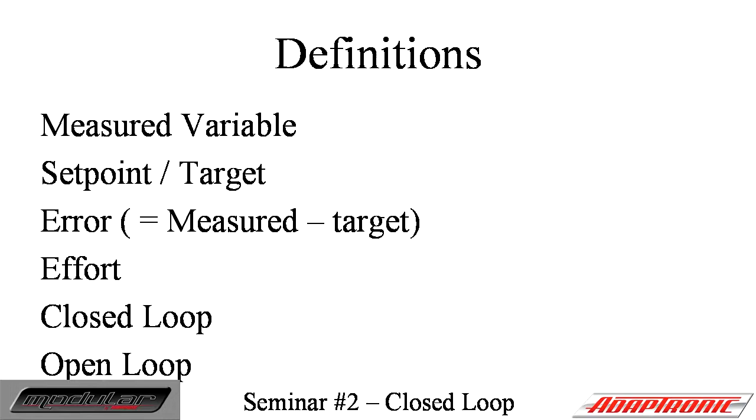And closed loop and open loop, I'll just show you this. So a closed loop system is where we have a target, and we have the RPM at the right-hand side, which is what we're trying to measure. The RPM minus the target is our error. Again, positive means that we're above the target, negative means we're below.

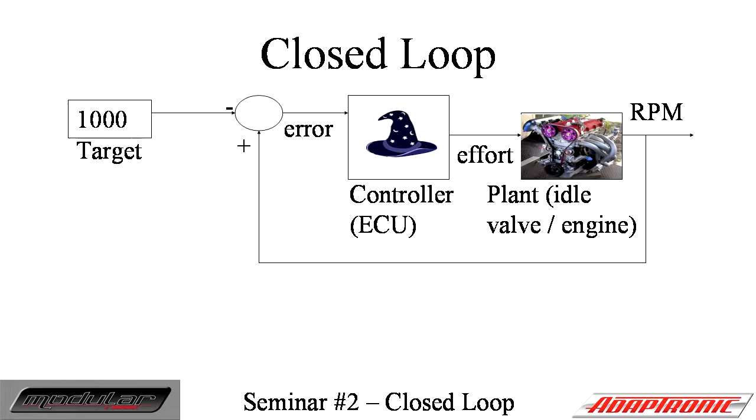That goes into some wizard magic stuff that we don't quite understand yet, but we will in about half an hour. Then that controls the actuator on the engine, so the idle control valve or boost control valve or electronic throttle or whatever the thing is that we're trying to control. That's called closed loop because you can see there's a big loop there, which is called the control loop. The alternative to that is open loop, which I think is a pretty silly name because there's no actual loop there. But that's what it's called, so there you go. I don't make the rules, sorry.

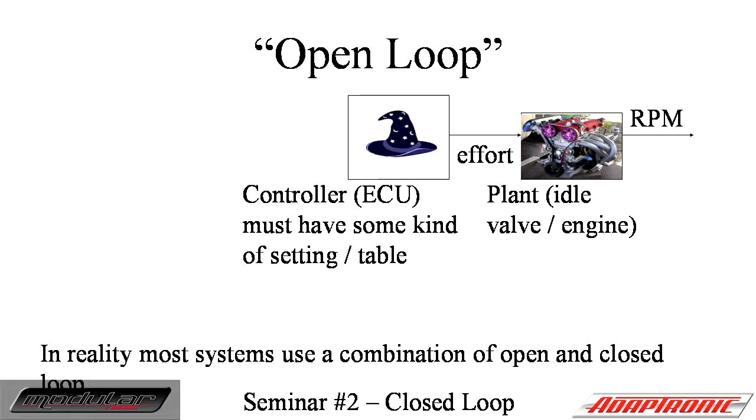For this to work, the controller has to have some sort of setting or table, so whether that's a duty cycle table against coolant temperature or whatever. But the point is that it doesn't actually measure the RPM, compare that to a target, and then use that to adjust the control effort.

In reality, most systems actually use a combination of open loop and closed loop. If you imagine a system which only had closed loop and no open loop, say if you're doing closed loop fuel control with an O2 sensor and you had no fuel map at all, it was just one cell, and you tried to drive it like that and just wait for the O2 sensor to correct the mixtures, it would be pretty awful to drive. So in reality, you need both in most circumstances.

Okay, so this is Tim Tam time. I want you to think of some examples of closed loop systems. For each of them, there's going to be some function on the engine, so what you would call it as a tuner, the variable that we're measuring, the actuator that the ECU can control, and the target. So does anyone have any ideas on function?

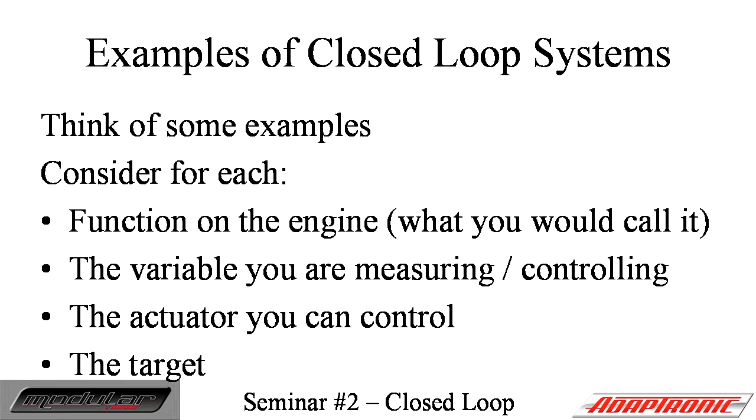Boost control. Hang on, I'll just tip all these out so I can get them easily. Okay, boost control. Any others? Fuel trim, yep. Variable valve lift, very good. Any others? Come on, there are heaps more. Take the easy one, idle control. Yep, idle control, yep. Traction control. Okay, cruise control. Oh, cruise control, yep.

Okay, I've got a really easy example that even the crappiest ECU on the market will do. Thermofan. The temperature is the set point. The actuator is the thermofan, and when it goes above the temperature, we turn it on. That controls the temperature of the engine by cooling it. Then when it goes below the temperature, we turn it off. It's not PID, it's not usually a pulse width modulated thing, but it is actually a closed loop system.

Another example you may not have thought of is a rev limiter. If you're trying to get to a certain RPM, or trying to not exceed a certain RPM, you do an ignition cut or fuel cut or however you want to do it, and that brings the RPM back down.

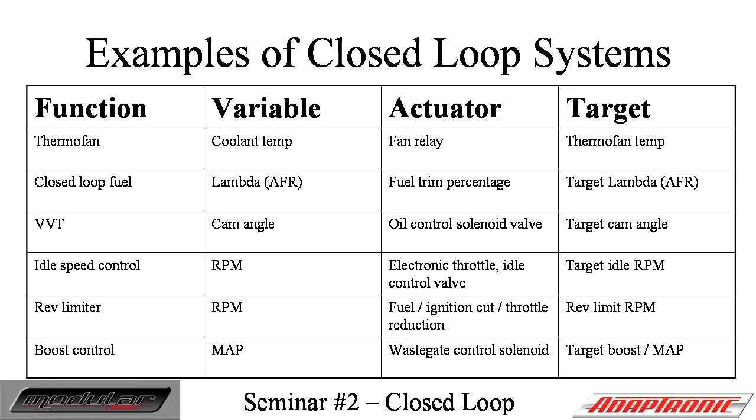Another one, actually boost control, it's actually a closed loop system even if you don't have an ECU in there. So if you just have the compressor exit routed through to the actuator, and that pushes the wastegate flap and controls the boost that way. So that's still closed loop even though there's no electronics in the system.

Okay, so I'm going to go through an example with some numbers here because PID is actually quite mathematical. I'm going to avoid any calculus or Laplace transforms.

So if you can imagine that we've got an engine that's idling at 700 RPM with an idle duty cycle of 30%. And this engine needs 40% on the idle valve to achieve 800 RPM. If our target's 800 RPM and our current RPM is 700, then that means our error is actually minus 100. Make sense so far?

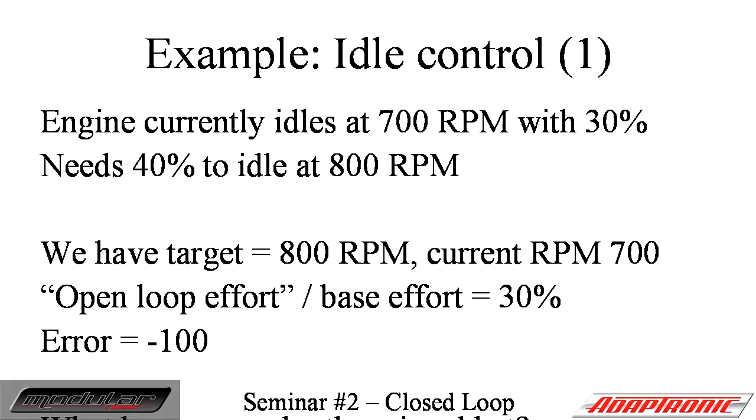Okay, so what happens then under this wizard hat to control the idle speed? What would it need to do to get it up to the 800 RPM? It's opening up the idle air control. Oh yeah, so it has to do that. It has to do that, but how much and when and under what conditions?

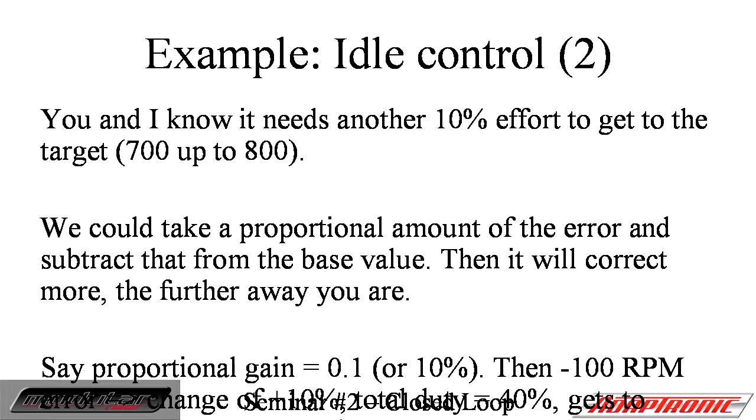So you and I know, because I've just told you, that we need another 10% of idle duty cycle to get to our target, but it doesn't know that. So the simplest thing to do is we could look at the error, which is minus 100 RPM, take a percentage of that and subtract that from our duty cycle. So for argument's sake, if we take 10% of that, then our 100 RPM error becomes 10%. We add that to our 30%, we end up with 40%. We're at 800 RPM now.

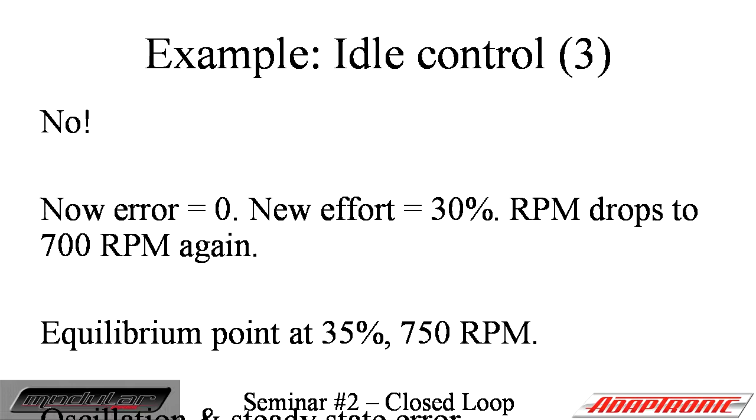Happy days? No, not happy days. Not happy days, because now we're at 800 RPM, so our error is 0. So now our new effort is 30% because it's our base value plus 10% of the error. So we go back down to 700 RPM with 30%. So now we're going to go back. So it's going to oscillate between 700 and 800 RPM and between 30 and 40% duty cycle.

Now there's actually going to be an equilibrium point there of 35% effort and 750 RPM. That's the point where the error exactly matches the gain times the extra percentage that we need to give to the idle valve. So it'll actually be steady at that point, it won't oscillate.

But there's a couple of problems here. First of all, that's 750 RPM, not 800. So there's still a constant error there. It's never actually going to reach 800 and stay there. And the second problem is that there's this oscillation problem that's going to occur.

If you reduce the gain, so instead of having 10% of the error, say we only have 5% of the error, then it might not oscillate, but then the steady state error is going to be even greater. It's only going to get to, what's that, 733 RPM or 725 RPM or something like that. So that's a problem. It's still better than not doing anything though.

Now, can you think of a mechanical system that's similar to a proportional controller? A thing where the amount of error you have is proportional to how hard it tries to correct it. Not talking about duty cycle, I'm talking about a completely mechanical system, no electronics, no thought, just a...

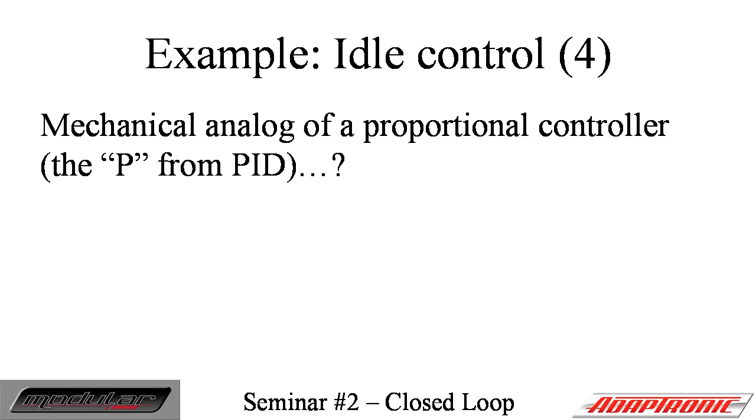Beautiful. Yep. Thermostat, yep.

That'll work. The examples I had were... but that's not closed loop though. It's not actually resisting, it doesn't have a target that it will sort of be happy at and then resist from. The examples I was thinking of were...

A fuel pressure regulator. The way that happens is you've got a diaphragm inside, the pressure difference acts on the diaphragm, makes a force, the force acts on the spring. Depending on how hard you push the spring, depends on how far it moves. Push the spring with twice as much force, it moves twice as far. That's the proportional thing, and you can put in a stiffer spring or a weaker spring to change that percentage.

As that happens - if you went to my talk yesterday - fuel pressure regulators always do have a steady state error. The more fuel you flow through them, the higher the pressure becomes. Or the higher your injector duty cycle becomes, the lower the pressure becomes, even on the best regulators in the world.

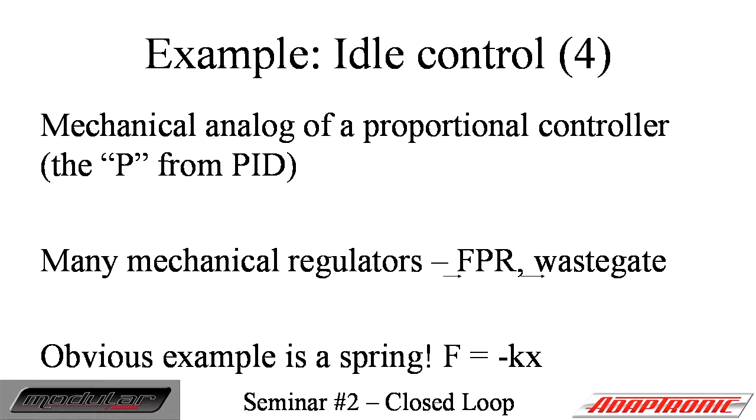Wastegate, like the example I gave before, if you've just got a mechanical wastegate - we all know what happens if you've got an actuator spring that's a bit too weak and your wastegate's a bit too small, you end up with boost creep at high RPM. One of the ways you can fix that - there's a particular turbocharger manufacturer that makes internal wastegates, and they tend to have this boost creep problem at high RPM. You can replace them with an aftermarket actuator, which I assume has just got a stiffer spring inside, and they don't do that as much, just because the proportional gain is higher.

But it's still there, there's still steady state error. An even more obvious example, a spring itself. Imagine a suspension spring on a car, where the happy point, where it's exerting zero force, is the uncompressed length of the spring. If you drop the car on it, it's always going to sit a bit lower. You put more weight in it and it'll force back up, proportionally. And if you hit the car, it's just going to bounce up and down - it's going to oscillate, just like the example we had before.

So the question is, can we somehow remember that 10% that we needed to get to that 800 RPM? Can we add it up over time to get there, so that we get rid of that steady state error and end up at 800 instead of 750 or wherever? And the answer is, yeah, we can.

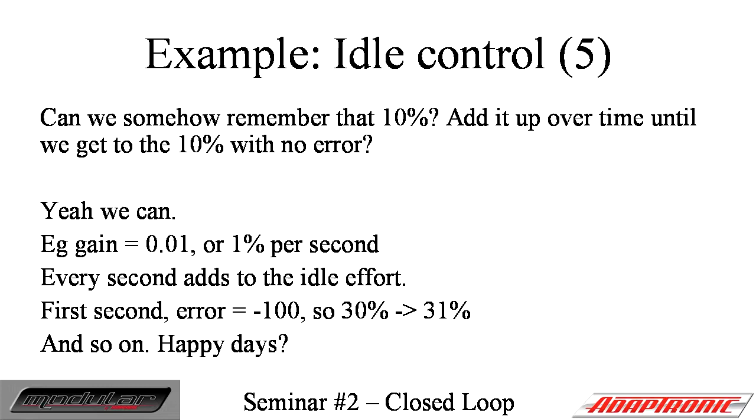So here's our target of 800 RPM. Here's where we are, at 700, right? And our idle duty cycle is here at 30. So that's not really well lined up. Okay, there we go.

1% of that is 1%, right? So go up to 31. But now we're not at 700 RPM anymore, we're at 710. So now this new error is not 100 RPM anymore, it's only 90 - that means we're only going to go up 0.9, so it's 31.9. So it goes up a bit more. And that's not quite 80, it's 81 or something, so it goes up a bit less. So it eventually gets closer and closer and closer.

And eventually, as time approaches infinity, it'll get to 800. But it's going to take longer than 10 seconds to get there, so that's a pain. Can we just add 2% each time instead? Well, yeah, you can, but you end up with this oscillation problem. But we get rid of the steady state error, so that's a good thing - a good thing to remember. It's not enough, but it's something that will help.

I couldn't really think of any good mechanical examples of this.

Probably the best analogy I could think of was a toilet cistern, where it remembers, if you like, the volume of water, and then when it gets to a certain point, the float valve shuts it off. But that's not a proportional thing, it's an on-off thing, but anyway.

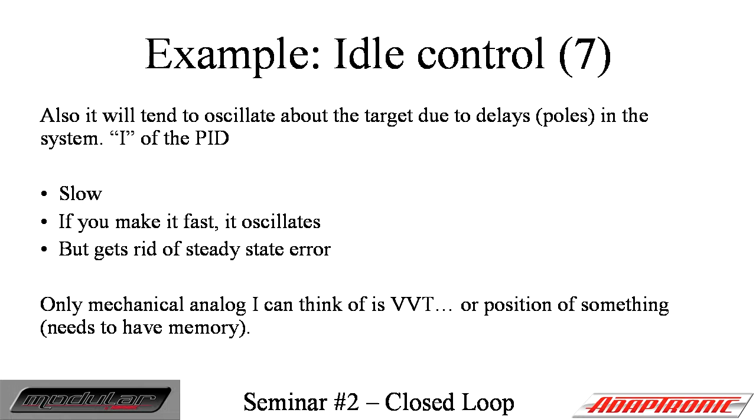So the other problem is that we have to have some way to damp the oscillations. The reason being that if you only rely on the proportional and integral terms I described before, it's going to be too slow. So you need to be able to have a large amount of proportional gain and somehow deal with the oscillations.

By the way, fuel pressure regulators, if you have large fuel pulses, you can actually get them to oscillate at certain frequencies. That's why on factory fuel rails they have dampers on them to deal with those oscillations. These days with people removing those and putting on billet rails and using hard Teflon coated lines to deal with ethanol, fuel pressure oscillations in rails actually becomes a big problem.

So how can we damp the oscillations? Well, normally the way you do this is by attempting to operate against the direction of change. So rather than looking at the RPM, we'll look at how quickly the RPM is increasing or decreasing. If the RPM is dropping quickly, then we'd actually increase our duty cycle to try and stop it dropping. If it's increasing quickly, then we'd decrease the duty cycle to try and counteract that. And again, that's going to be proportional, so if it drops twice as quickly, we'd open it twice as much.

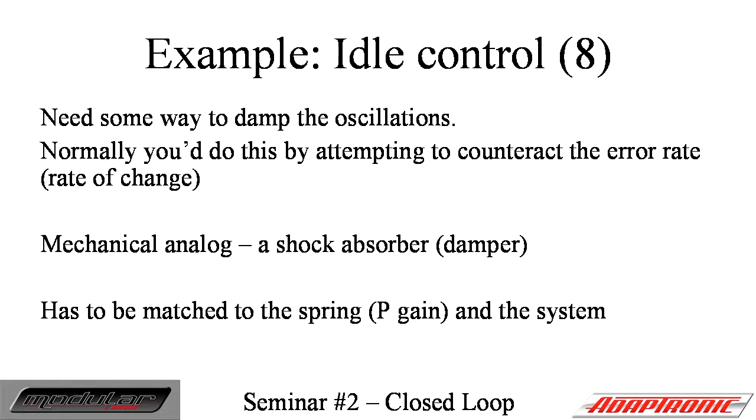And the mechanical analogue of this is, of course, a shock absorber or a damper. If you've got a constant length on it, it doesn't exert any force at all, and the faster you move it, the harder the force it responds with. As you probably also know, if you've ever played with adjustable shocks, you have to match it to the spring. If you turn it all the way to the soft setting, and you've got fairly stiff springs, then the car's going to oscillate, so it's not giving enough damping. And if you turn it all the way hard, then it'll actually slow down the response of the spring, and the suspension will be too stiff.

So in practice, what you need is a combination of the proportional, integral and differential gains, and they'll need to work together. I'll go through how you work out what those gains need to be empirically when you've actually got a system that you can play with. We've actually got a system downstairs which I invite you all to have a look at as well, but I'll tell you about that later.

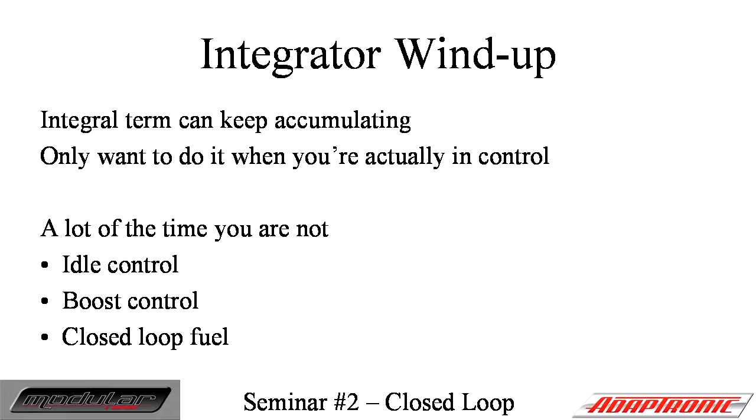Now, the next thing I need to talk about is a problem called integrator wind-up. We have this system where, because of the integral term, our duty cycle can increase or decrease over time continuously, while ever there's an error there. So what we have to make sure is that we're actually in control of the system we're trying to measure at the time. Otherwise, it's going to go all the way one way or all the way the other way. I'll give you an example of that with idle speed control.

I bring that up because I care about drivability. The ECU has to have some way of knowing whether it's actually in control of the idle speed or not. So for example, sometimes people say, well, can't you just look to see if the throttle's closed? No, because you might be in gear, driving along with the throttle closed, and the engine might be at, say, 2,000 RPM because you're traveling at 30 miles an hour or whatever. So the car's pushing along the engine, if you know what I mean.

So if you have the ECU in closed loop idle control at that time, then it's going to say, well, we're idling too high at the moment because we're targeting 800 and we're actually at 2000, even though the engine's not actually idling. It doesn't know that. And it'll keep dropping down the duty cycle. Then you put your foot on the clutch when you stop the car and the engine stalls. So that's a particular problem. The way different manufacturers get around this is by having either clutch or neutral switches or a vehicle speed sensor, and then it only goes into closed loop when the car's stationary.

Another example is boost control. If you're trying to target a certain amount of boost and the turbo's not actually spun up yet, so it can't actually make the boost you're trying to target, then the boost control is going to keep increasing the duty cycle in vain because there's no way the turbo can make that boost yet. And then at the higher RPM, when the turbo does come on boost, you're actually going to get a boost spike because of this integrator wind-up problem.

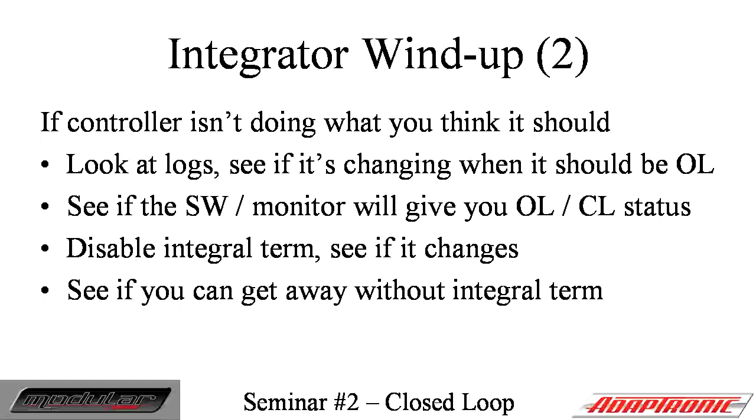Another way you can check it is by actually setting the integral term to 0 and seeing if you still get the problem. If you do, and you either can't get away from this because the controller doesn't have enough information to go into closed loop or open loop, or you don't have the ability to switch it into closed loop or open loop, you can see if you can get away without the integral term.

The way you'd normally set it up is start with PID at 0,0,0 and try to do as much control as you can from the proportional term. The reason being that's the fastest to act, and it doesn't suffer from integral wind-up issues and that sort of thing.

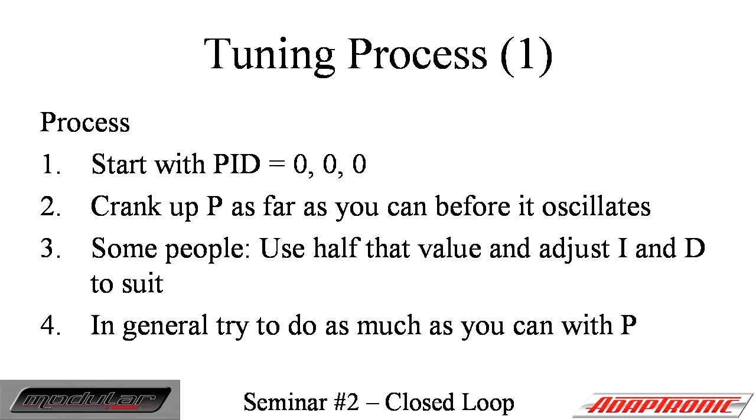What some people generally say to do is crank up P as far as you can before it oscillates, then use half that value. I'm a bit more aggressive, so I normally use a bit more than half that value, and then adjust I and D iteratively to suit - I adjust I to get rid of the steady state error, and D to adjust the oscillations.

So you can see this if your software allows you to do striplines - a rolling log that sort of moves across the screen - then you can see the oscillations very clearly in that sort of environment, and you can adjust D accordingly.

The thing that limits the amount of derivative gain you can apply is normally how fast the system is actually sampling the variable you're trying to control. So coming back to idle speed, often you can't use a lot of derivative control for idle speed because the measurement of RPM only happens every compression or induction stroke - so on a 6-cylinder, it's every 120 degrees, for example.

That will limit how high you can put the D term. If you can't get it high enough to control the oscillations, then you need to reduce the P. And if you get the I as high as possible before it starts to oscillate, that allows it to get to the steady state as quickly as possible.

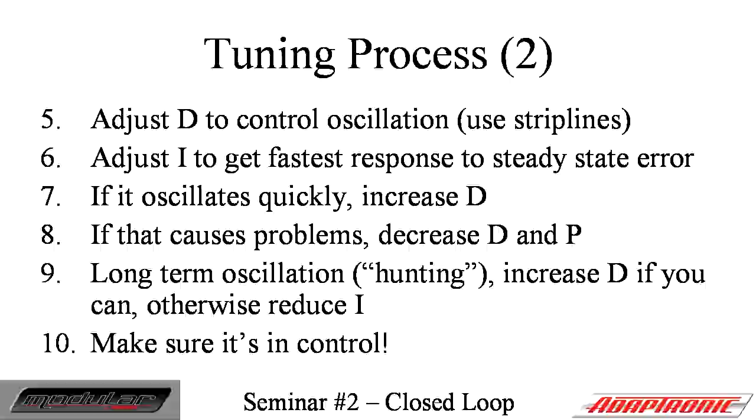Okay, so I've got a couple of examples here of actual logs from people that I've seen.

I wonder if I can turn down the house lights? Just a little bit. I don't think you can turn them off completely. Okay, do that.

Okay, now it looks like I've got one Tim Tam left here. So who wants to have a guess as to what's wrong with the settings?

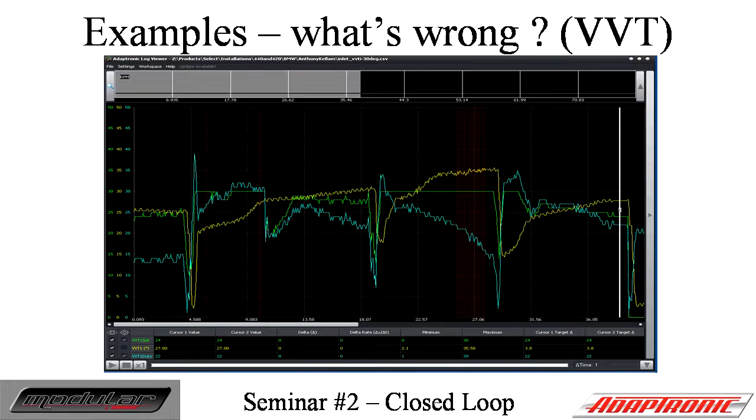Too high on the P? Too low on the P. Too low on the P. Now, should I give it to the first answer or the correct answer? I'll give it to the first answer, I think. I think I already gave you one. Okay, so who was too high on the P?

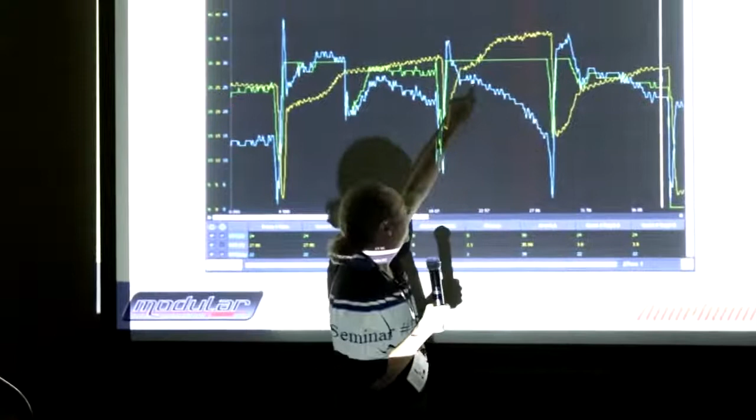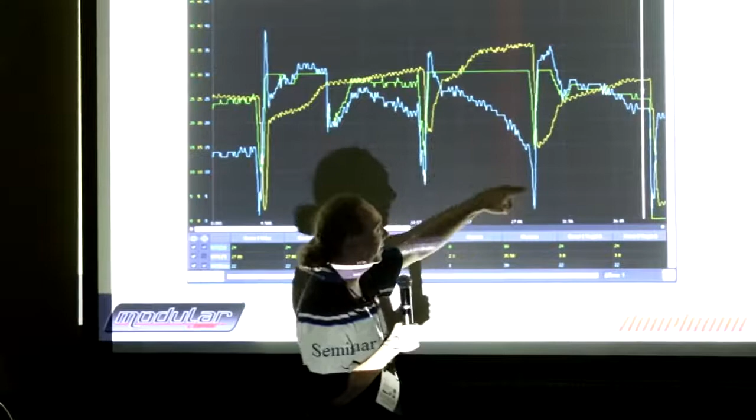Maybe it's a bit hazardous doing this in the dark. Anyway, you can see that in this area we're still above the set point, and our duty cycle is dropping over time, which means it's the integral term doing that. But it hasn't dropped low enough yet to bring the cam down to where it's supposed to be. So in other words, you could say he's trying to do too much with the I, but really the answer is that the P isn't high enough to actually control it.

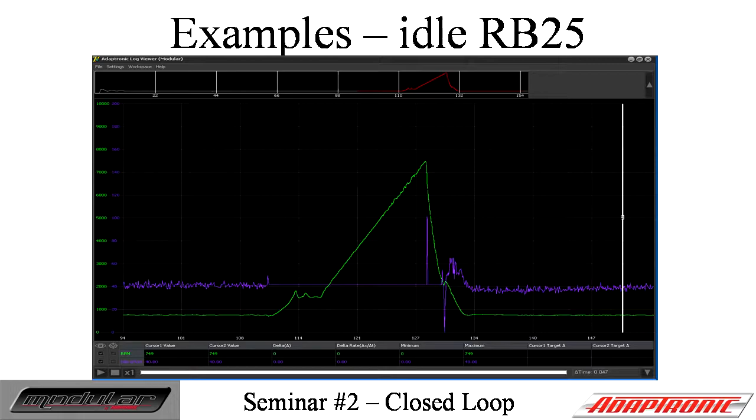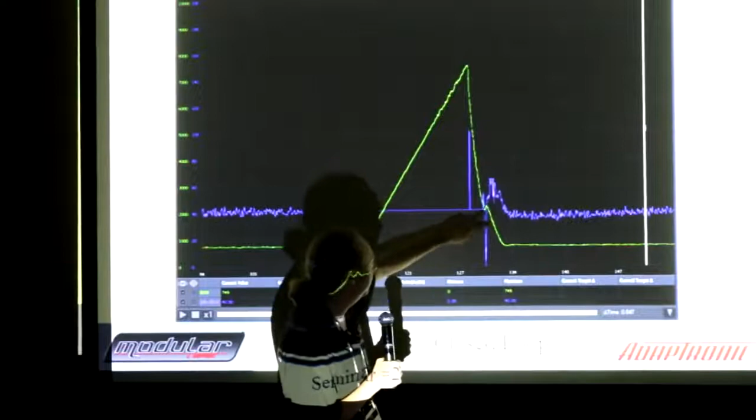And then you see it goes flat during the power run because we're not in idle control then, since the throttle's open. On the way back down, this is where I put my foot on the clutch, and it gives a little spike there. At this point, it's actually increasing the idle effort using the derivative term to just bring it back down to idle gently. After that, it's very nice and flat.

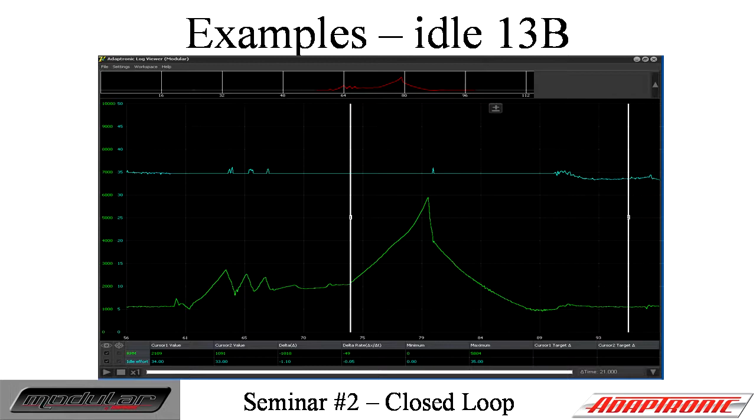This is another one with the 13B, but that basically just shows the same thing anyway.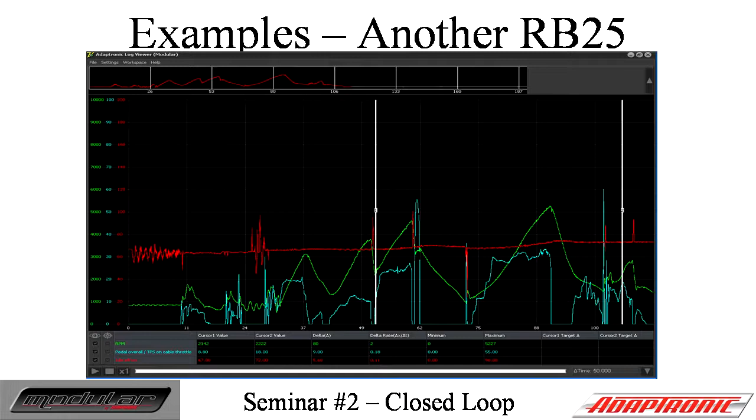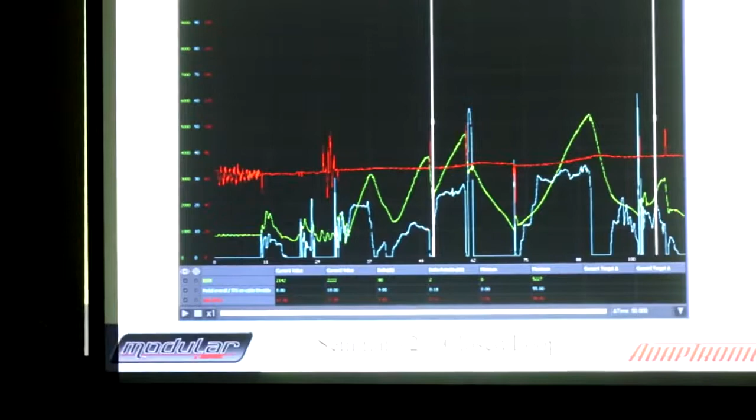Okay, I don't have any more Tim Tams, I'm sorry. But does anyone want to guess as to what's wrong with this one, especially here? We see this is RPM here. You can see a bit of a wiggle in the RPM, but it eventually settles down. And then we've got another wiggle there where that's supposed to be at idle.

Can anyone have any ideas as to what's wrong with this one? Red is the duty cycle? Yeah, red's the duty cycle. And the light blue one's the throttle position. Integral too high? Derivative's too high. Yeah, so...

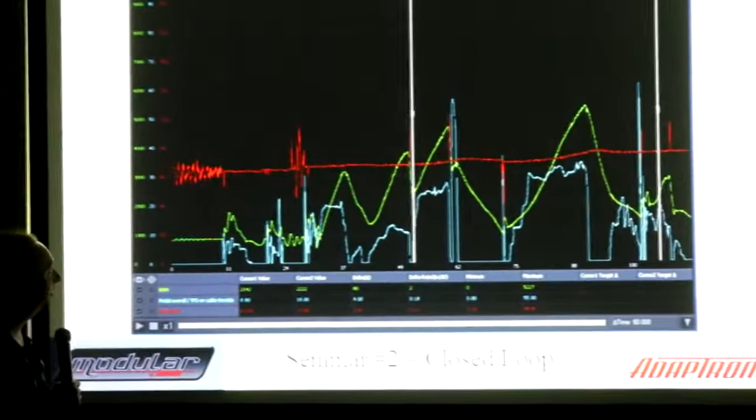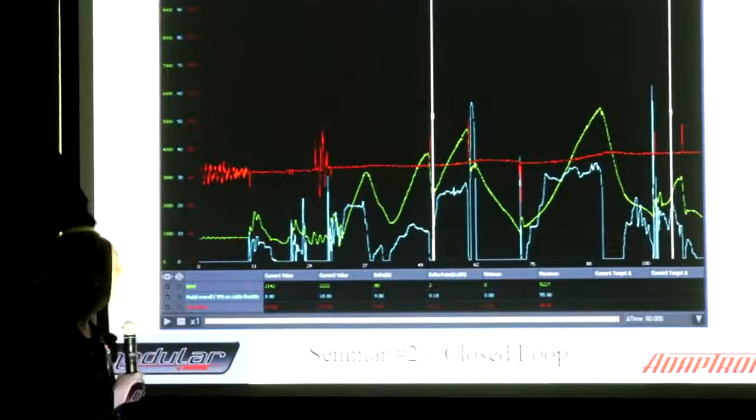This is an example, like I said before, of where you're sort of at the limit of how much derivative you can run. You can see the duty cycle is going up and down very quickly, and the RPM isn't moving that much, so pretty much that has to be due to the derivative.

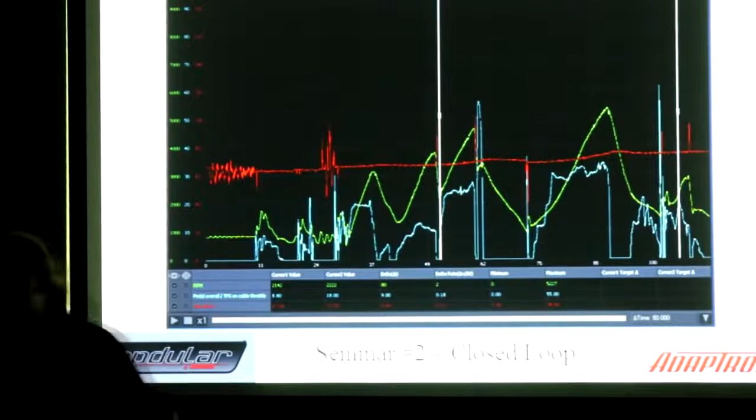But it's actually reducing here over time, getting a bit smaller. But I think we'd agree that it's not really satisfactory, you couldn't really give that back to a customer. So in this case, we need to reduce the derivative, which probably means we'll also need to reduce at least the proportional and maybe integral as well.

This talk is a bit shorter than yesterday's, but basically I just wanted the whole point of this to be that I think people can understand PID without getting into Laplace transforms, frequency domain stuff, and pole-zero plots and that sort of thing.

Also, a lot of this is fairly similar in terms of mechanical systems like springs and dampers.